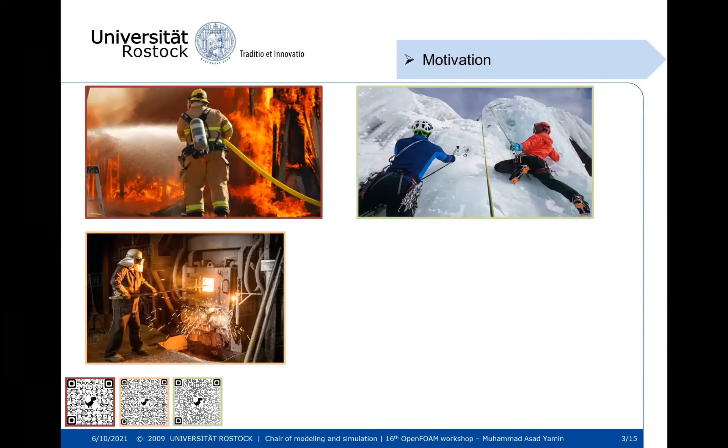From the motivation, I want to introduce the modeling of human outerwear like footwear, clothes, helmets, and gloves, which is very important and taking on greater importance day by day, due to crucial weather and working conditions like firefighting, forging and casting, and sport activities and championships. Just for the motivation, this video quality is a little bit off, but you can see it's running.

For the porous material in this situation, we have the fibers, water inside the fibers, and the water going from the fiber to liquid water. We have 3 types of water: vapor, bounded water, and free water. The transitions between these are sorption, desorption, condensation, and evaporation.

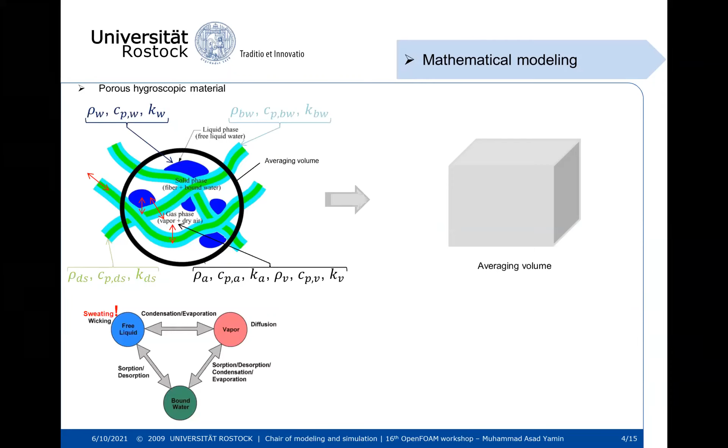In this model, sweating is not considered in the beginning. For the broader view, we change this material, because this material has physical properties: density, thermal conductivity, and heat capacity for the liquid water, bounded water, dry fibers, and the air and vapor present in the moisture. With more than 26 empirical formulas, I equate them, and at the end we have a new material with relative humidity and the corresponding relative physical properties.

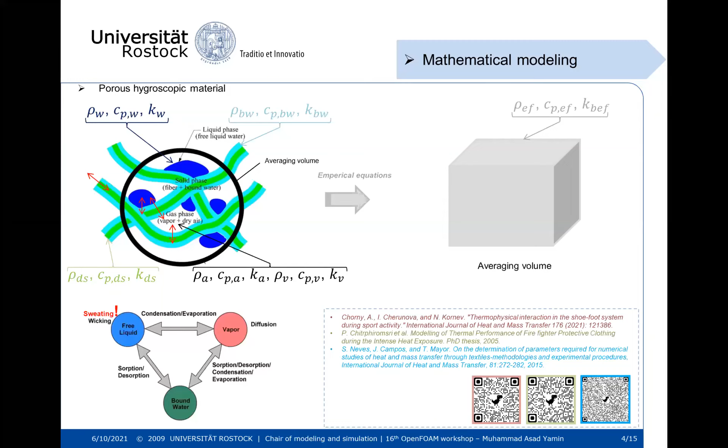For the full mathematical model, we have 4 transport equations: for water vapor, bounded water, and liquid water, with the parameters shown before. For bounded water and liquid water, we have equations for the water going from gas to liquid to gas, and then solid to liquid, liquid to solid, and gas to solid.

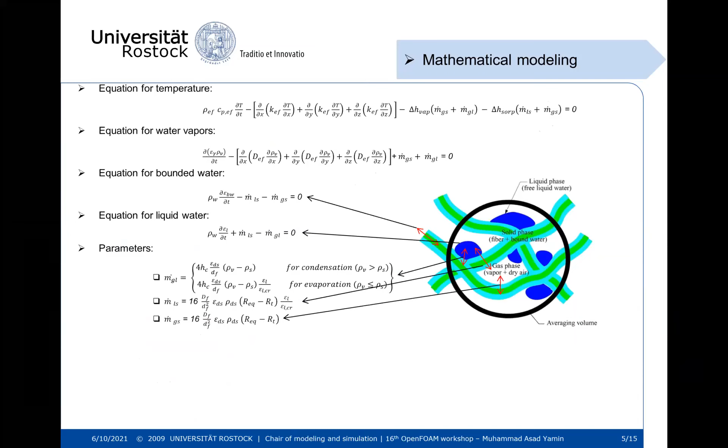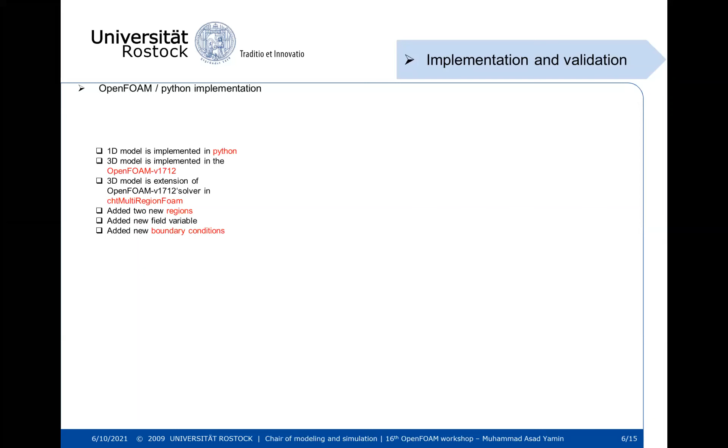Now I want to explain a bit about the implementation and validation. For implementation, we implemented a 1D model in Python and a 3D code in OpenFOAM, version 1712, using the solver chtMultiRegionFoam. This is actually an extension of that solver, where we added 2 regions for the fiber and the foam, along with some field variables and boundary conditions.

In this study, I consider the fiber region and not the foam region, because in reality the heat content and moisture come from the shoe to the sock surface. But in the future, we will also consider the foam region.

For validation, I have used the Gibson model, which is the most important model used for validating the results of this model. In the rows you can distinguish between the temperature plots and the vapor density plots, and the columns represent the hygroscopic and non-hygroscopic material.

For the simulation of the Gibson, I see for the continuous line or the dotted line, and overall simulation is matching with the dotted data. So it's exactly matching in the hygroscopic material that we will achieve at a very high value, and for the non-hygroscopic, it's achieved very early.

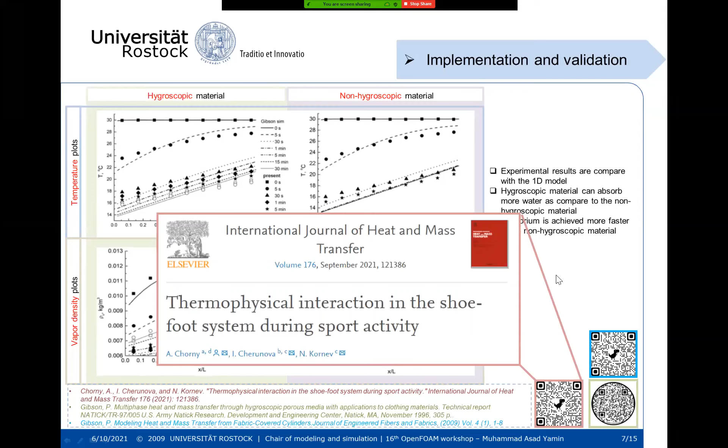Okay, thank you. So for this one, we have already submitted this paper last year and last month, and it has been accepted. So this model is which I am working for the 1D. So for the implementation for making the geometry, we use the 3D scanner for making this geometry.

And after this, because this geometry is very complex with very small layers, very small thickness, even less than 1 millimeter, you can see the socks which we get from this 3D scanner. We have the holes, and it's very difficult to make with the snappyHexMesh, the machine.

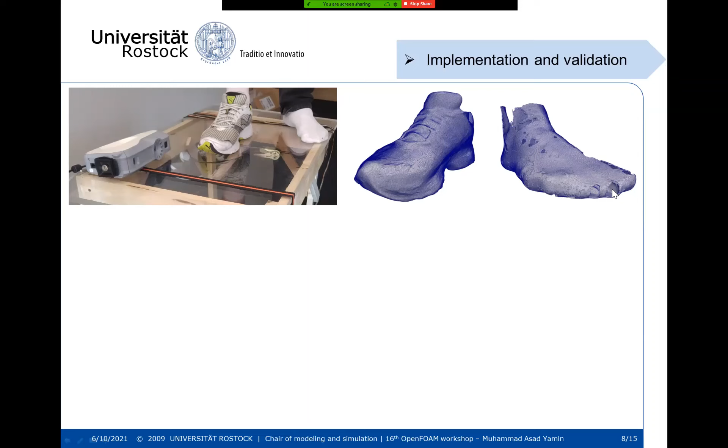It's very common, but for the 1D we have just taken one line and then extruded it, and then results implemented for the real shoes. But for the 3D actual result, I made just a more replica near to this shield, the shoe, with 3 layers for socks, shoe, and with different boundary conditions.

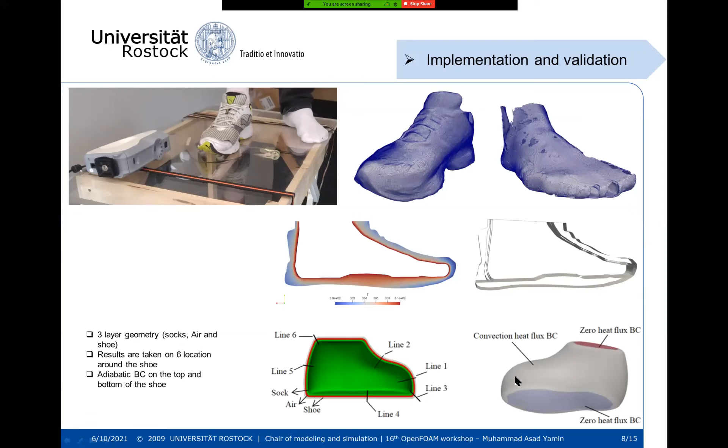The Dirichlet boundary condition is on the inside on the socks, and for the outlet we have 3 types of boundary conditions, with adiabatic on the top and bottom, and heat convection on the side. So the vapor density, meaning the humidity, and the temperature, we take as a boundary condition, Dirichlet boundary condition, at the inlet.

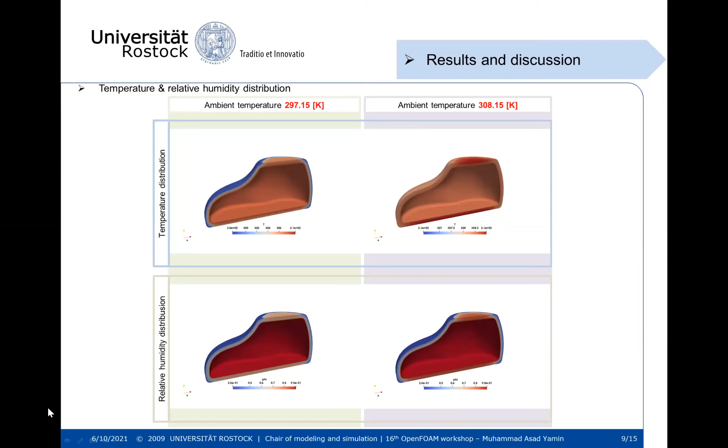So for this temperature distribution, I want to show the temperature and relative humidity, for the ambient temperature 24 degrees centigrade and 35 degrees centigrade. So here you can see, if you look column-wise, the temperature is more uniform at the high temperature, so the temperature reaches very near to the outside and inside of the shoe.

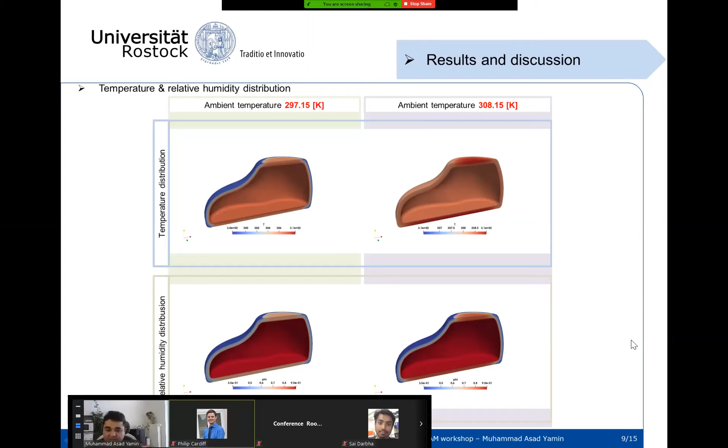So if I show you the temperature distribution results, you can see for the ambient temperature 24 degrees centigrade and 35 degrees centigrade, for the shoe material polyester, polyamide. And here I am just changing it so the inside the sock is cotton and the outside shoe is polyamide.

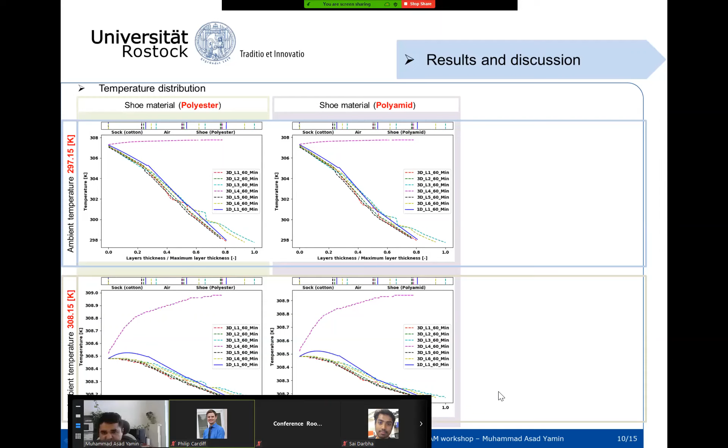So if you compare, you see at first there is not a huge difference if we compare the 1D results with the 3D results, because in the 1D just the temperature gradient is in the normal direction to the footwear, but there isn't a lot of temperature gradient in the transverse direction.

But in the same way, if you see at the ambient temperature 35 degrees centigrade, there are 2 phenomena: one, evaporation is coming into account, and second, the comfortable level of the shoe is also becoming very low.

But at the end, if you calculate the difference between these two simulations, you can see the more comfortable level is with the shoe material which has more thermal conductivity, meaning the polyamide. Here the shoe will be more comfortable at the low ambient temperature.

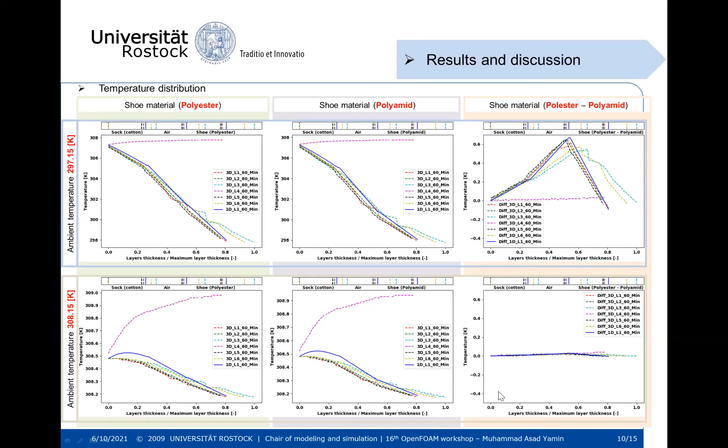But if the ambient temperature is high, then this phenomenon doesn't matter which material you are using, the comfort level for both shoes will be the same. The temperature distribution will be the same. It's a very good finding for this.

A lot of research is present in the literature where they have modeled the shoe with just conduction and convection, without moisture transport. But we also want to analyze this behavior, how it acts if I use the moisture content versus without moisture content.

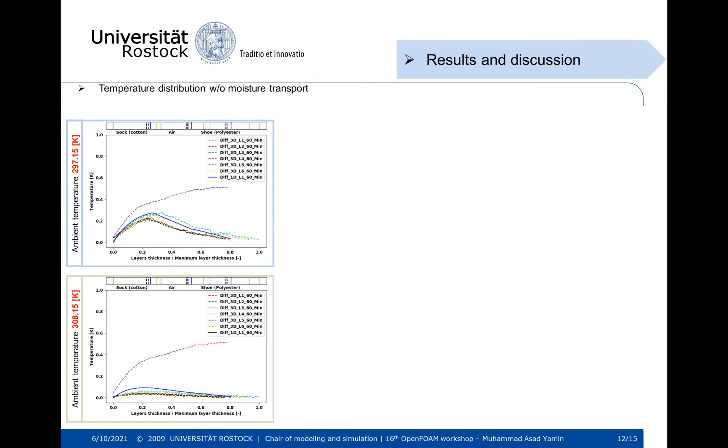At the low temperature, you can see this has very less difference, less than 1 Kelvin, and at high temperature it's also decreased. But I didn't find any data on whether this 1 Kelvin difference, if this high temperature remains in the shoe for 60 minutes, will affect the comfort level of the wearer - this is still under debate.

So I want to see for the 1D model, if I change the thickness of the shoe layers for the socks and the shoe, does it affect the moisture transport modeling.

At the low temperature, if the temperature is very low, you can see with more thickness of the layers, the effect is growing.

But at the high temperature, you can see here this is a negative effect. Why negative? Because evaporation comes into account - the state of the water is changing, but it didn't raise the temperature. But in the other case, without the moisture transport model, the temperature is raising because there is no moisture there - the moisture transport modeling is not present there.

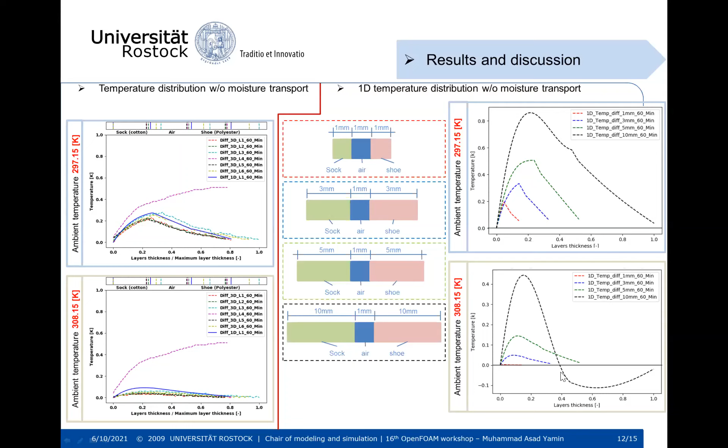So at the end, to summarize and conclude: the majority of the temperature gradient is in the normal direction in the footwear, and the sole is the most uncomfortable part of the shoe. At 24 degrees centigrade ambient temperature, the shoe with the higher heat conduction value is more comfortable, and at 35 degrees ambient temperature, the comfort level of both fibers is approximately the same.

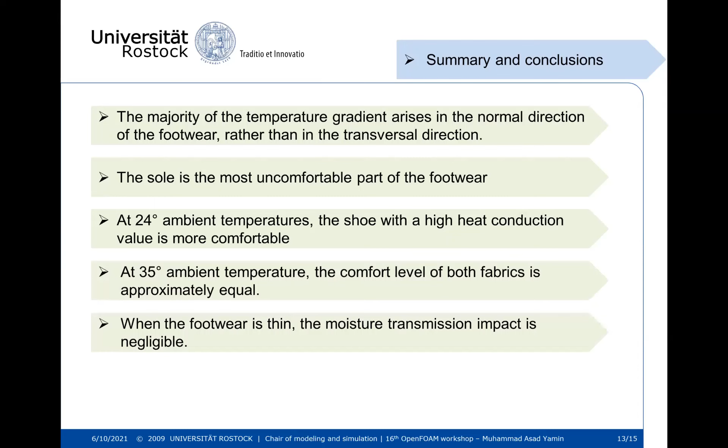When the footwear is thin, the moisture transport impact is negligible. But the last conclusion - when the ambient temperature is high and the footwear is thick, then the moisture transport impact might be significant. This is just one conclusion.

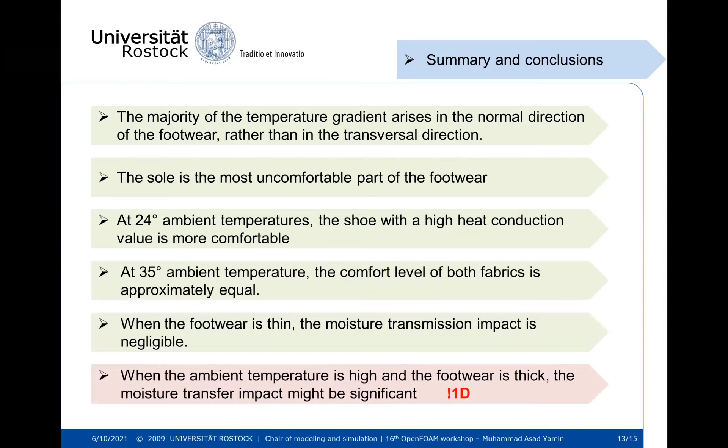This is for you, for the questions. If you have any question - this is from my supervisor, Professor Cardiff, and Professor Vigan.

So this is all from my side. Sorry for the interruption a little bit in there.

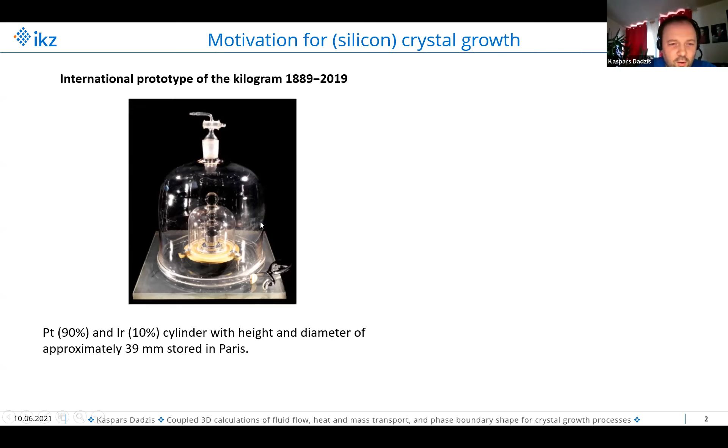Actually, if you think about the history, how the kilogram was defined, this is what was used till 2019, this very old prototype stored in Paris. And what changed recently was that the new prototype of the kilogram unit is actually made of silicon, and this was done because silicon is one of the most perfect and pure materials which can be produced at all. And that's another important application of silicon.

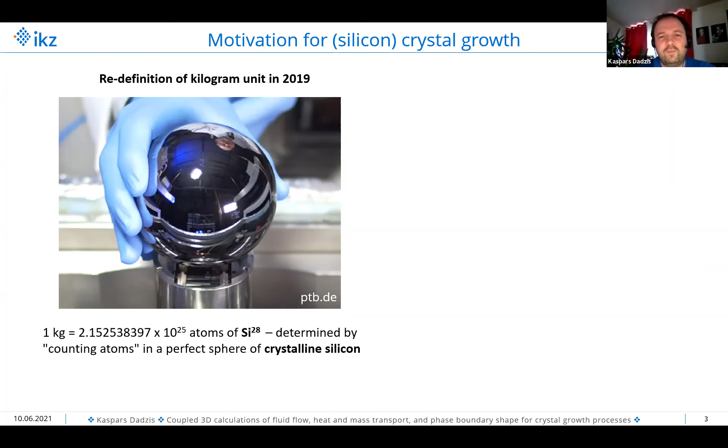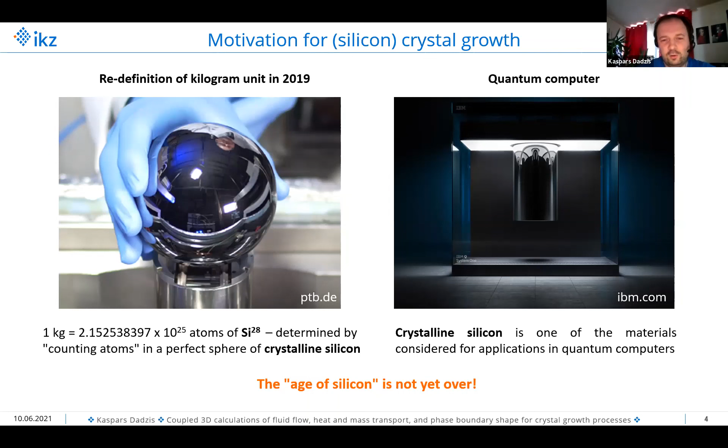And of course, if we think about the future, silicon is also one of the materials which is still researched for quantum computers. So I can say in conclusion, the age of silicon is still not over. So the question is how do we get such silicon crystals for all these applications? And this is the topic of my presentation. There are many methods which are used for different applications, and they differ in quality and also costs and so on. And I will try to introduce all of them to you a bit.

The simplest one, which was used for solar cells, is the so-called directional solidification. It's quite a simple method. We have a container where we melt the raw material, then we have the liquid, then we cool at the bottom, and the liquid freezes from bottom to top, and we have a moving phase boundary. So it's quite easy to understand, but of course you have a lot of physics here. You have melt flow, heat flow, you can have some forces driving the melt flow, and so on.

And the basic idea is the same for all the other methods, like the Czochralski method, where we pull the crystal out of the liquid, and also for the granulate crucible method, where we have not a container, but actually a layer of solid silicon granulate which contains the liquid. And the most complex method is the floating zone method. In this method, the melt is actually sitting on the crystal itself, so the melt does not have any contact with other materials. It was the method used to produce this kilogram unit material.

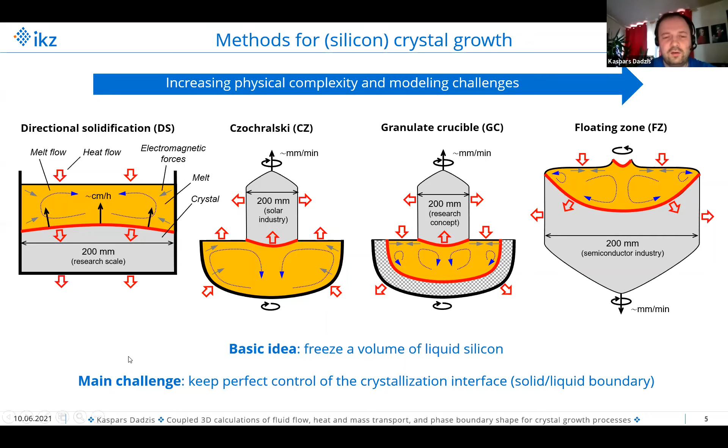So as I said, the basic idea is quite simple. We have to freeze a volume of silicon, but we have to do this in a very controlled manner, and we need to keep perfect control of the interface between the liquid and the solid. So let me show you briefly how this works in reality. First we look at the Czochralski method, where we have a liquid which has been molten in a container, and then we touch the material at the surface with a solid seed, and then we pull it out, and we have this kind of rod which is solidifying, and this is the grown crystal.

This is the Czochralski method, and the most challenging method is the float zone method. Here we have a high frequency inductor, and we are pushing from the top a rod of solid material, and it's being melted by the inductor, and we will see what happens next. We can see this is the liquid part here, and it is sitting on top of the growing crystal. So it's a very dynamic method where the liquid is freely sitting on the crystal. But it's a very big liquid drop, and the diameter of this crystal is up to 200 millimeters. In this movie, it's 100 millimeters.

Okay, so that's just to give you an impression how dynamic these processes are, and of course, to make some models for such processes, we need an easy frame of reference. Let's put it that way. And the most convenient frame of reference is a case where we have an interface at a constant position.

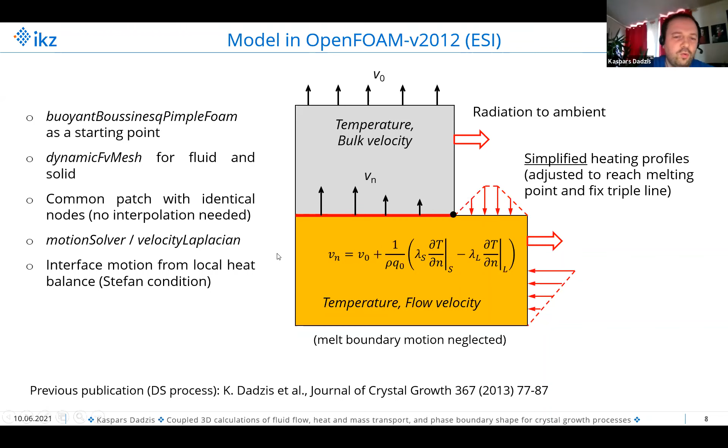Okay, so the first task is to make a mesh, and what we tried here is to keep it as simple as possible and use blockMesh. It's quite important for this process to have good boundary layers, and in blockMesh we have full control of this. But if you think about these very curved geometries, you can understand that the setup becomes quite complex. So therefore, we developed a Python package where we can connect many blocks, up to 51 blocks, in an object-oriented way, where the topology, connections and grading work automatically.

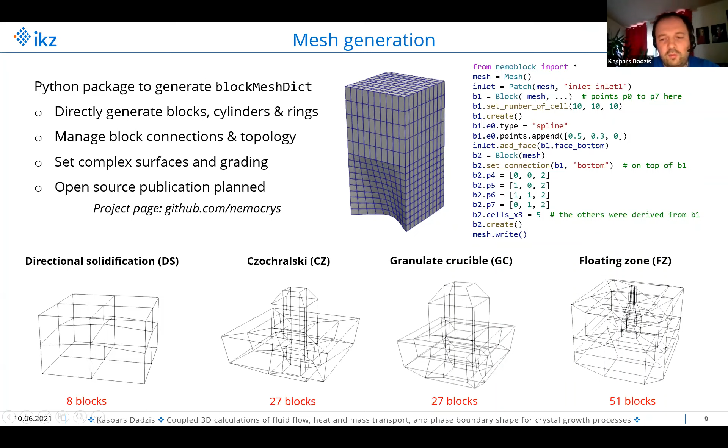So this is what we started, and this will be published open source. So if you are interested, let me know. And here you can see a very simple example for this 2-block geometry, and this is what you actually need to write as a script in Python, and then the library generates a blockMesh dictionary. And here you can see the topology of all the geometries which I showed to you, and it goes from 8 blocks to 51 blocks. Okay, so let me show you a few examples for all these cases.

So we start with directional solidification, the simplest method, and what you can see here is at the beginning we have 10,000 seconds where we just calculate the temperatures, then we calculate also the mesh motion for 10,000 more seconds, and at the end we have 200 seconds of melt flow. You cannot see this so well in this picture because it's showing just the temperature field, but you can see quite well the deformation of the boundary between the solid part and the liquid part. You can see it starts moving now, and the triple line here remains at the same position.

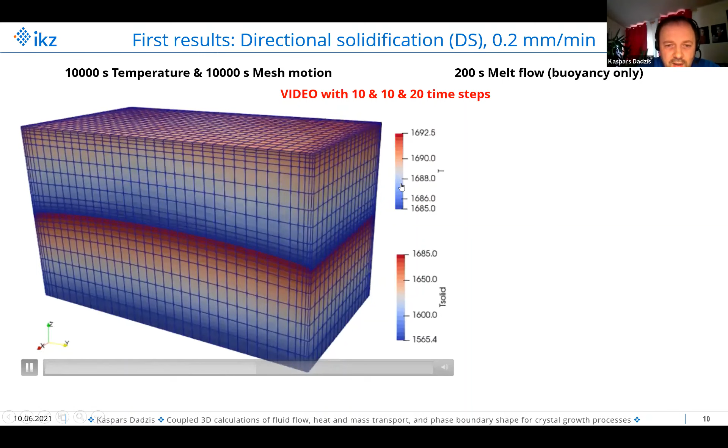When we look at the flow, we have considered just buoyancy in this case. You can see a flow pattern with quite weak velocities because the gradients are not so large in this method.

But nevertheless, there are some problems here when you look at the deformation. So you need to be very careful with the mesh and mesh motion methods to keep this stable.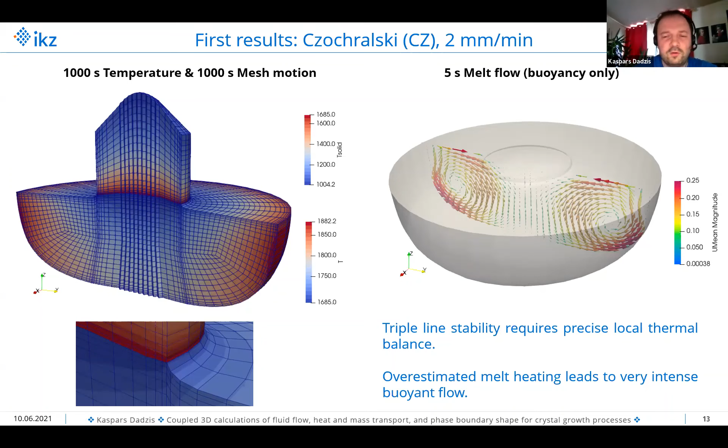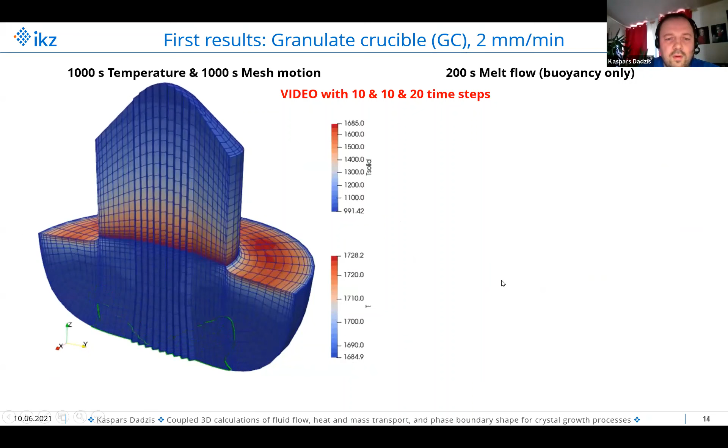Okay, the third method, the granulate crucible. You can see the interface will start moving now, but it remains still quite flat. And at the end, when the melt flow is starting, you can see also some mixing here in the melt. And when we take a closer look, we can again see a buoyancy flow here, but it's much weaker than in the previous case because the heating is done on the top here. In the previous case, it was done here at the side.

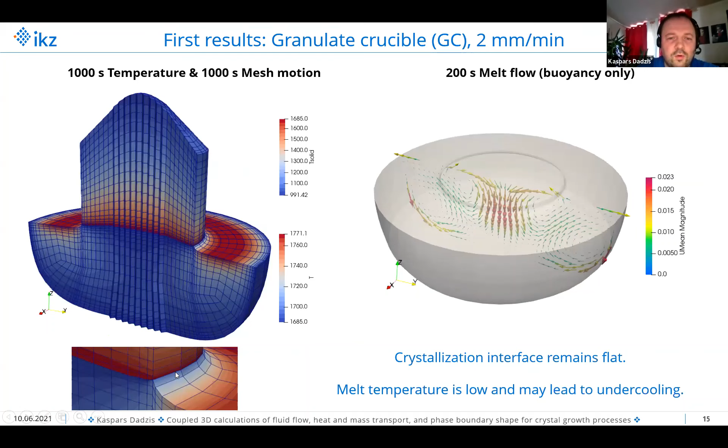So the last example is the float zone case, where you saw the video at the beginning. So now the interface starts moving, and we can see the crystal is growing longer, and the interface also goes down, and it's also quite deformed, and this is a kind of a feature of this process.

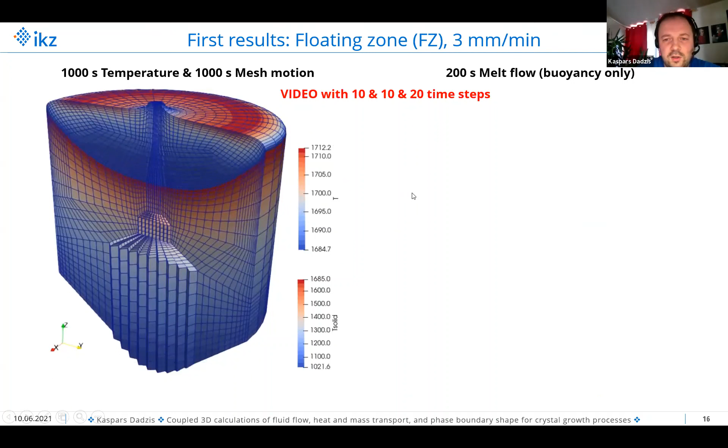And what we can see here again for the melt, we can also have a not very strong melt convection, but it can have an important role in the process. And here we can see a problem also with the mesh, due to the high curvature here at the triple line.

So let me come to some conclusions. So this was the new solver, which aims to investigate the dynamics of several crystal growth processes for silicon. And in the future, we will also consider more exact boundary conditions for the temperature and also more forces in the melt. And of course, we will need to try different methods for grid deformation which are more robust. And finally, we will also need some validation experiments where we will use model experiments for this.

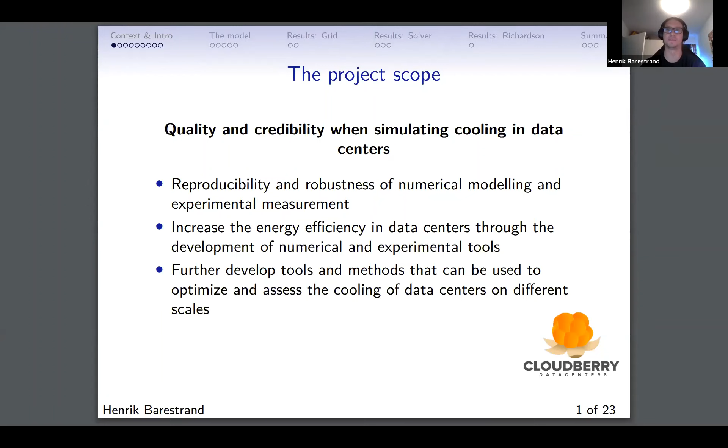So in data center CFD, my project is about quality and credibility, simulating cooling in data centers. It's about having reproducible results to then use those models to increase energy efficiency in data centers, and then to develop tools and methods to run these models in an optimization sort of mindset. The goals of this work have been to model the data center facility, check the grid requirements, and compare these two solvers, which is sort of an integrity check of the OpenFOAM solvers in themselves.

We know that the Boussinesq approximation has been thoroughly studied, advantages with incompressible, and we know something about the errors that we can expect. For data centers, we don't know this. So part of this has been to see the feasibility for data centers, to see how much we actually gain. And it has been demonstrated to solve the fluid flow in data centers before, so now we do it slightly more thoroughly.

Data center modeling is nothing new in CFD. So here we focus a little bit on the grid sizing, everything between 6 inches, close to 15 centimeters, to 1 inch in the open airspace region, because we know data centers are very big and we have long periods of time in between server loads and how they distribute.

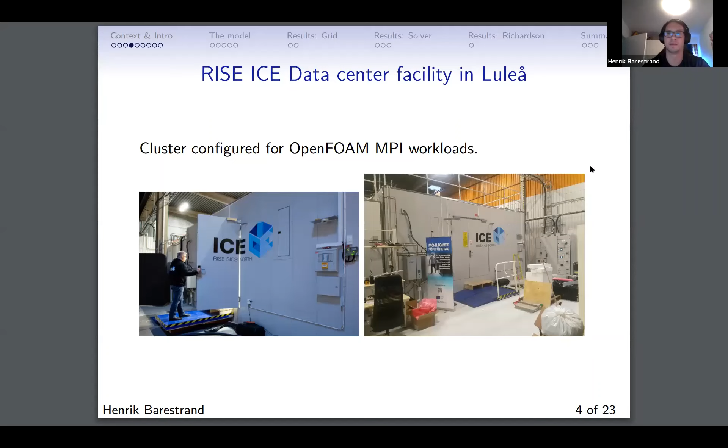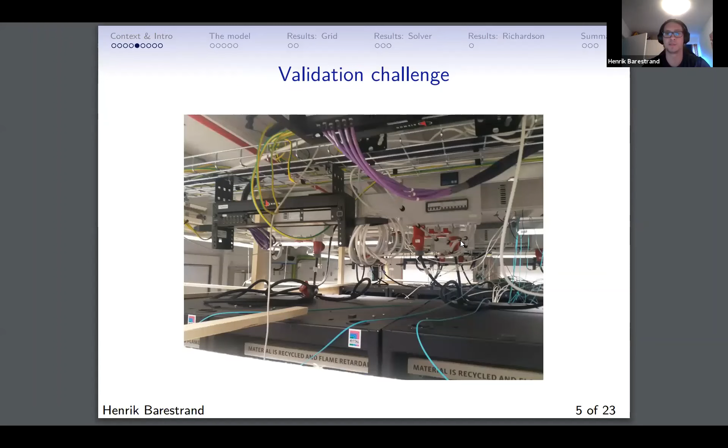We have our facility in Luleå, where we have configured a cluster for OpenFOAM MPI workloads. And we use this cluster to simulate this data center test cell that we have, which can look something like this. Hence, it's a validation challenge. But here, the focus is on verification with OpenFOAM. So we have a very simplified model. It's not exactly the same data center, so we don't have to worry about porous zones and such for those cables. But it's still quite a simplification.

So what you see here are 2 rows of racks, where we have cold air coming in on the blue sides. We have 10 of these racks, and then the slightly hotter air on the orange parts rising to the roof. Air comes back into the cooling units on the sides. We have 4 of them. And then cold air is delivered to the servers from these gray areas. This is a hard floor configuration. In reality, it might look something like this. We have these 2 cooling units, a porous zone in front that sends out this cold air in a uniformly distributed manner. And then we have the front side of the servers.

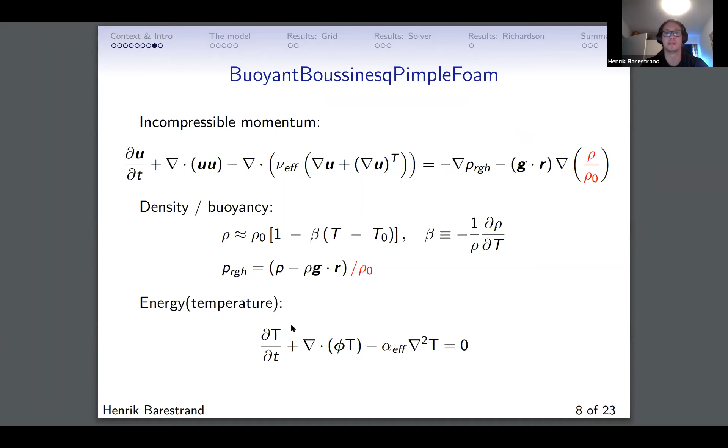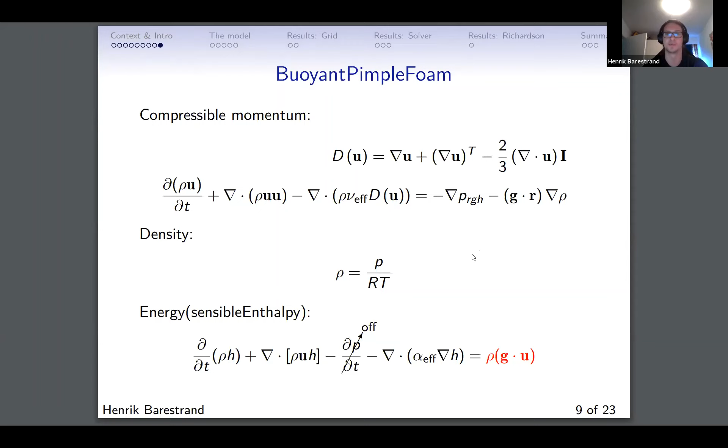You know, buoyantBoussinesqPimpleFoam and its assumption of how density varies linearly, and the incompressible simplification. And the energy equation, in this case, is very simple. And buoyantPimpleFoam, where we have the compressible version, we have the equation of state and an added term to the energy equation, with this pressure term off for the pressure work, as it makes quite a difference in convergence properties for this type of problem.

As for the boundary conditions, we increase rack enthalpy by the server load. And other than that, we have constant mass flow rates on everything. So it's a steady state situation, but we need to solve it transiently to estimate turbulence statistics. And there's a small opening in the roof set for the atmospheric pressure reference to improve the convergence.

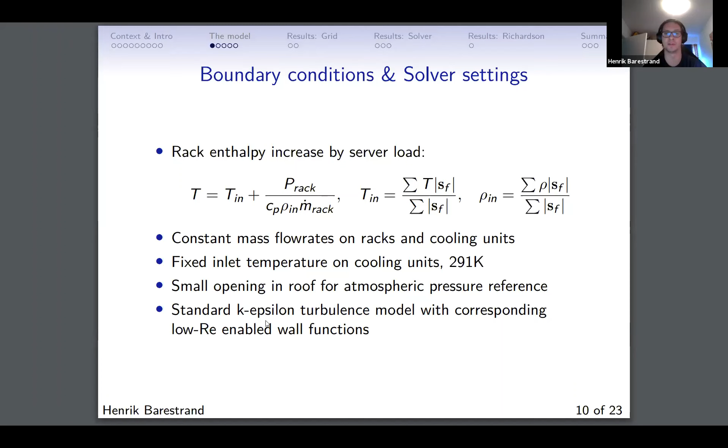With this sort of flows, there's no other alternative than to try to use RANS models to get computational economy. And we have low Reynolds number enabled wall functions at the walls. We try 7 different grids in between 100K cells, something like that, to 2 million, even 10 million at some point, but it shows different results.

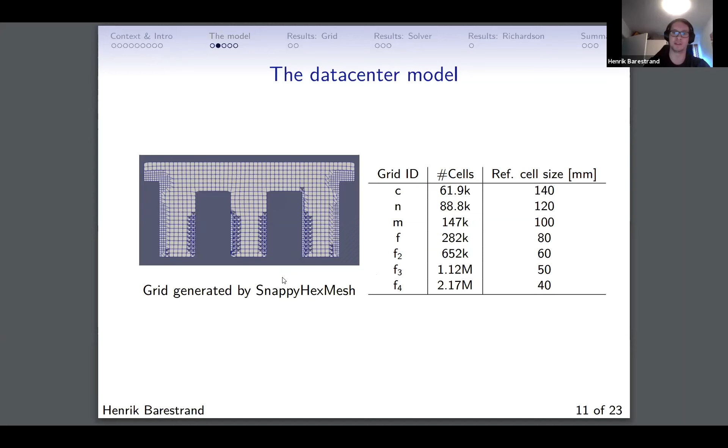And the grid is generated by snappyHexMesh. Something like this for a simulation matrix to test out the Boussinesq and compressible solver. And then we try 2 different flows, a typical mass flow for server flow rates and a low mass flow for server flow rates. And as you can see for the finer grids, F to F4 here, the wall Y plus starts getting close to 30, which means we are in the buffer region here. So we can't refine more because we will lose accuracy of how the RANS models are defined.

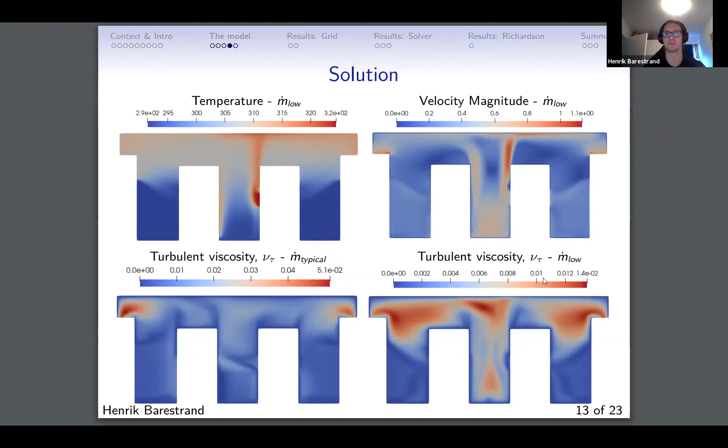So if we then look at the solution, here you can see a typical cross section of a solution. Low flow rates on the top for temperature and velocity magnitude. And you can see the hot aisle air coming up to the roof and then out to the servers on the sides. And then we have typical turbulent viscosities. And there's an order of magnitude lower for these turbulent viscosities when we have a lower mass flow rate to the bottom right here.

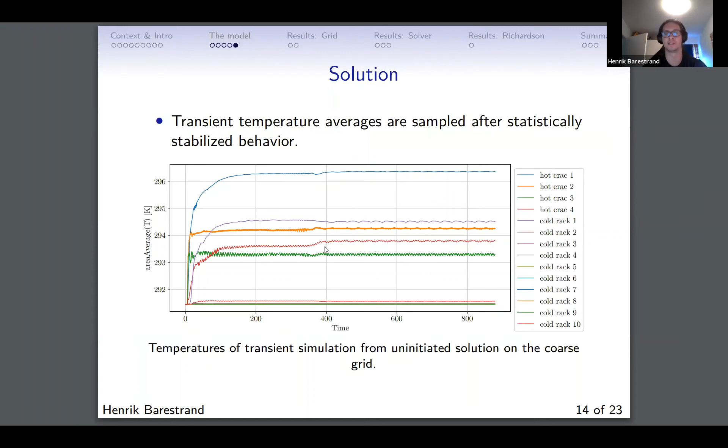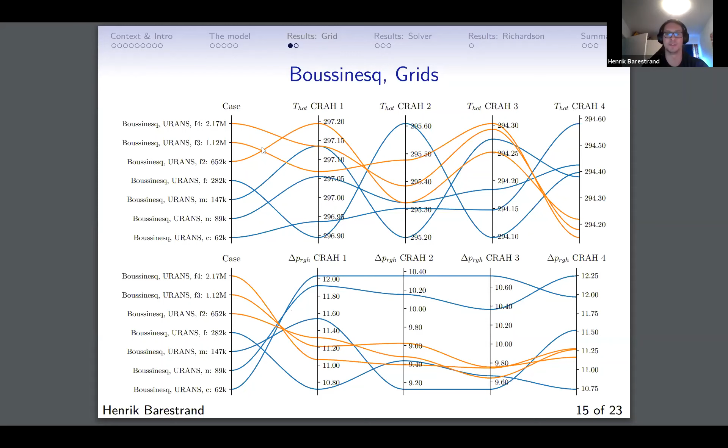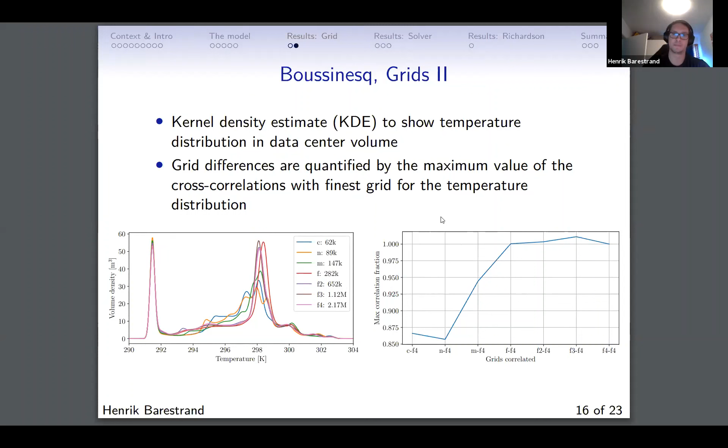So if we look at the graph to the left, we see the 3 finest grids. They are pretty much spot on onto each other, no artificial numerical diffusion in the volume. And that's also again confirmed on the right graph, where we see that this cross correlation starts matching up really well. And these are all in reference to the finest grid. So now we know that. We know the Y+, we know what sort of grid we need to be in that region.

We can compare the Boussinesq and compressible ones by a visual inspection like this. And we see the Boussinesq one has the coarse grid, the F grid here. It's slightly off. This happens because there is recirculation into one of the servers. So hot air starts coming back and we heat it up twice. So for Boussinesq, this would have to go a slightly finer grid than the compressible one. Yes.

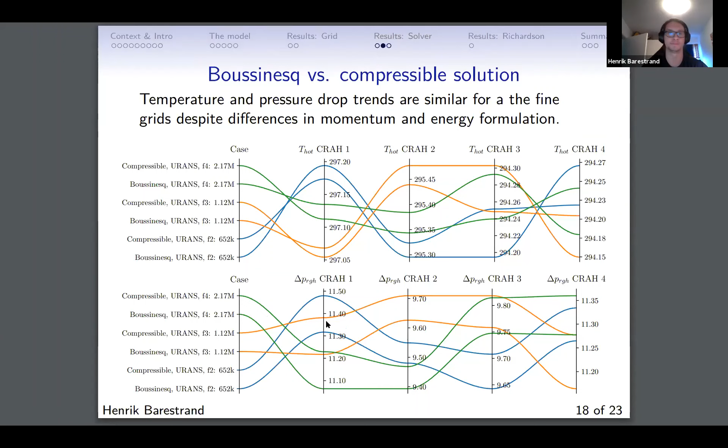And then if we compare the solutions for these 3 grids, we can see consistently for the pressure drop, being the bottom graphs here, being in the 11 Pascal range. The pressure drop is consistently higher in the compressible solver. And this has to do, I think, with the extra thermal energy equation and also it being compressible in itself. But the trends are pretty much exactly the same, other than that, also for temperature. So that's reassuring.

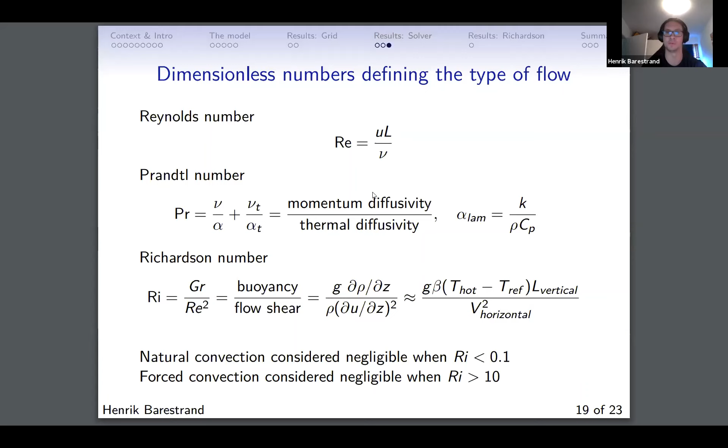Richardson number, closely connected to the Boussinesq assumption. And we know that we have forced convection; you can neglect it when you have Richardson higher than 10. And natural convection is what we want to work towards. So we want to see, is it feasible if we take down the fan speeds to have a natural convection?

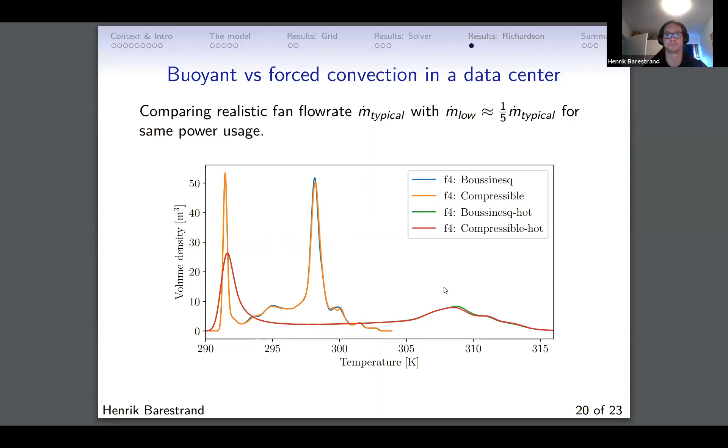And then for the hot case with lower flow rates, we see that certainly there is a higher temperature generated from the servers, also acceptable in terms of CPU temperature. And they still match up pretty well, Boussinesq and compressible.

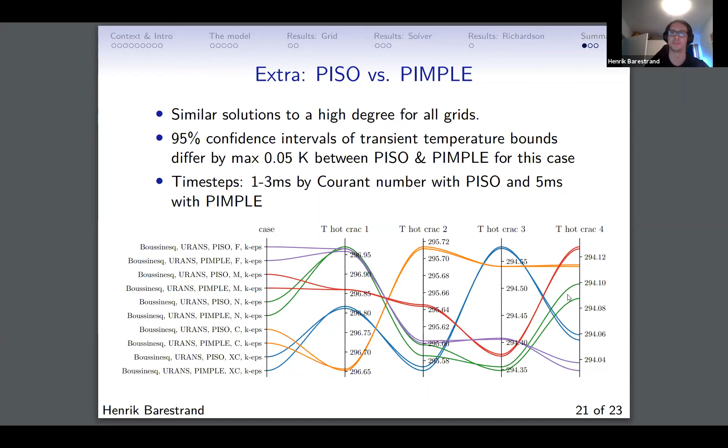And we come to the conclusions with that. Solvers are viable options. Pressure drops are consistently high with the compressible solver, as expected. The compressible solver is slower, between 20 to 40 percent, though it's experienced to have better convergence, so we can rely more on that one. It possibly allows a more coarse grid. That's all from me, thank you.

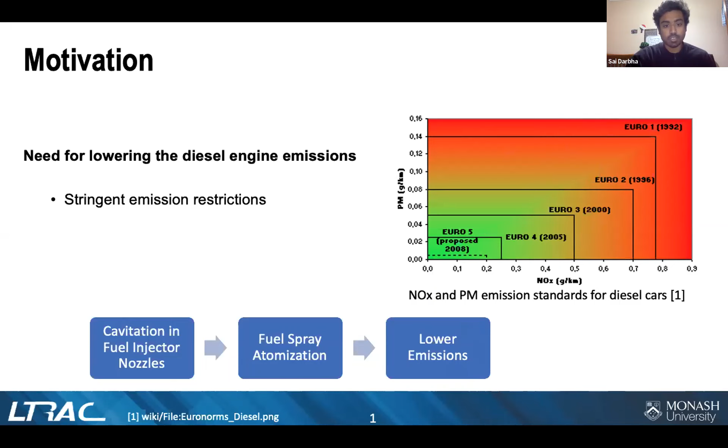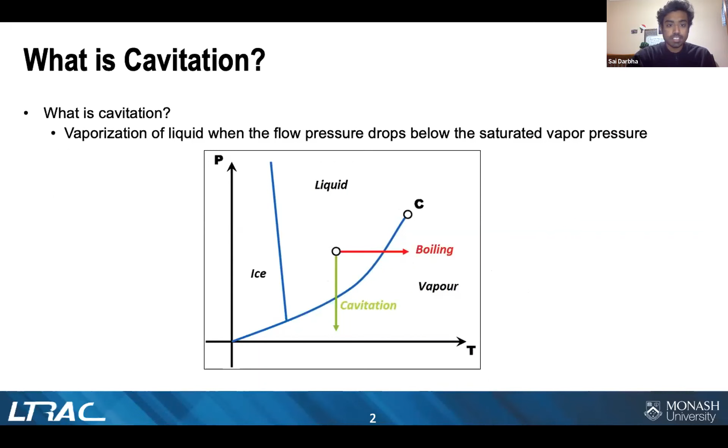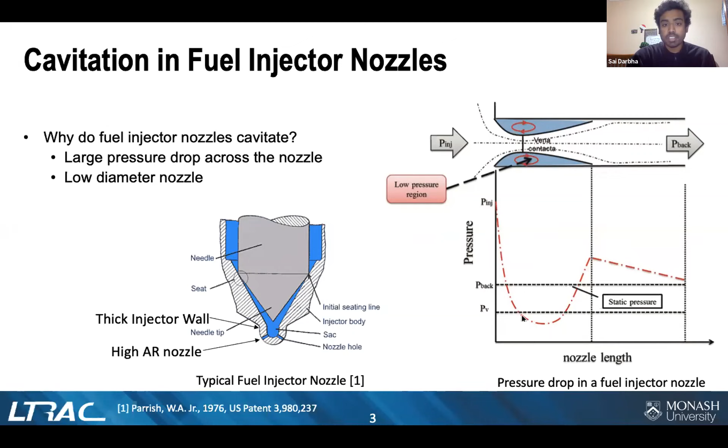Let me start by explaining what cavitation is. Basically, it's the vaporization of liquid when the flow pressure drops below the saturated vapor pressure, as seen in the phase change diagram. Fuel injector nozzles cavitate because the fuel rushes in from the upstream region at very high pressure and passes through a very small diameter nozzle. This is important to form a fine mist in the combustion chamber. As the fuel passes through the small diameter nozzle, the flow accelerates, and near the nozzle inlet, the flow pressure can drop below the vapor pressure, giving rise to cavitation.

We all know from marine applications that cavitation is often thought to be detrimental because the implosion of cavitation bubbles causes erosion, and that can be seen here on the injector wall, which is damaged because of cavitation.

However, in fuel injector nozzles, there is an advantage to having cavitation. Researchers have seen that with the presence of cavitation, the ensuing outlet jet spray has a larger cone angle and lower mean diameter. Basically, it has a better spray.

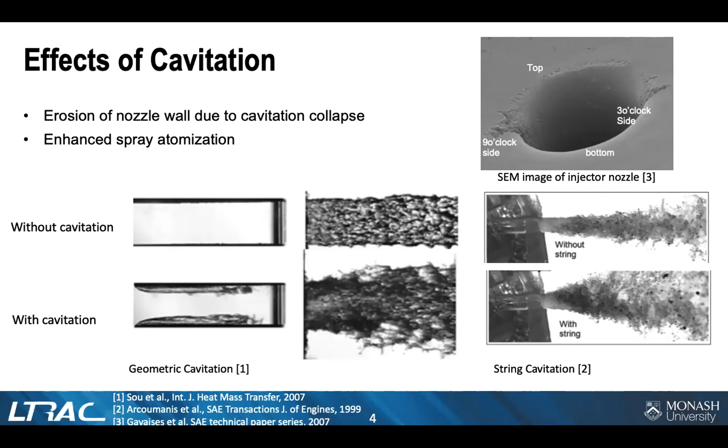However, the nozzle internal flow, which affects the outlet spray, is not well understood. One reason for this is the inherent limitations in experimental investigations, owing to the scattering of light at the liquid vapor interfaces. Further, due to the small diameter and high flow velocity and pressure, numerical models are often used to supplement experiments to characterize the flow within the nozzle.

In this work, our goal is to study the fundamental fluid mechanics instead of modeling a complete prototype realistic fuel injector nozzle. Therefore, we use a canonical cylindrical geometry as shown here, which is just a change in diameter, and the flow comes in and gives rise to cavitation within the nozzle. Our aim is to characterize the cavitation intensity as a function of the flow parameters.

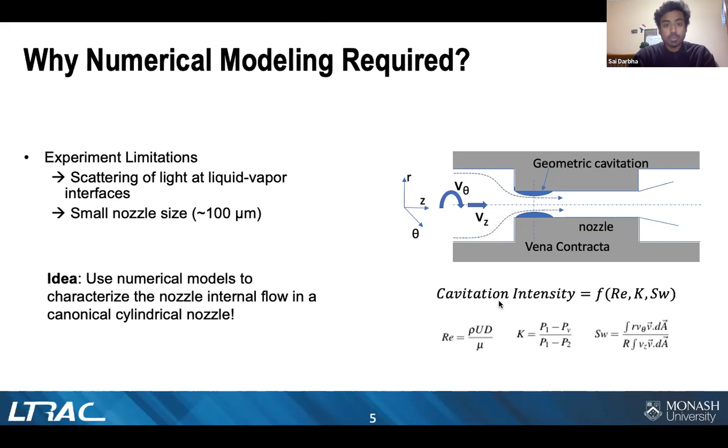The first step is to determine the computational models to be used. For modeling the multi-phase flow in the nozzle, the most detailed approach is to solve conservation equations for both liquid and vapor phases. However, that is prohibitively expensive, so we introduce some simplifications.

The first simplification is to consider a pseudo single fluid, which is like a continua consisting of both vapor and liquid phases. We also use a homogeneous flow assumption, wherein we assume there is no momentum difference between the two phases. Using these assumptions, we can solve for the mixture density.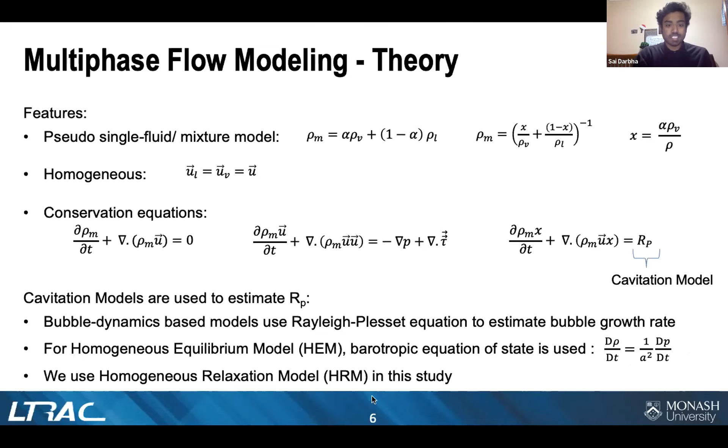For example, bubble dynamics models use the Rayleigh-Plesset equation to estimate the bubble growth rate. We use homogeneous models in this work, wherein the homogeneous equilibrium model uses a barotropic equation of state, which couples the pressure and mixture density. We use a homogeneous relaxation model in this study, for reasons I'll explain.

There are two extremes in the spectrum of homogeneous models. One is the frozen model, where no heat transfer is considered between the phases. On the other extreme lies the equilibrium model, wherein the heat transfer between the phases is considered instantaneous. However, both of these are actually unrealistic extremes.

We would like to model something closer to nature, wherein there is a finite time taken for the heat transfer. So we use a homogeneous relaxation model, which models the non-equilibrium heat transfer using an empirical correlation.

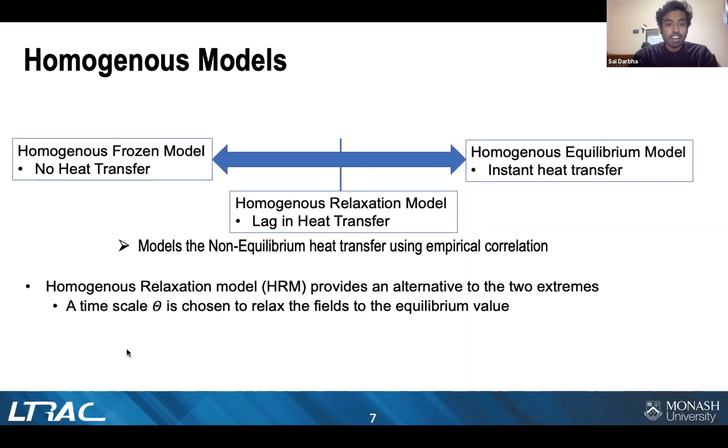A timescale theta is chosen to relax the fields to the equilibrium value. This is how the homogeneous relaxation model solves for the change in quality: it relaxes the instantaneous quality to the equilibrium quality using the empirical timescale theta.

This timescale is obtained using the Downar-Zapolski correlation, where Downar-Zapolski had done experiments on vaporization of water in long cylindrical pipes to obtain a relationship of theta with respect to alpha, the vapor fraction, and psi, the non-dimensional pressure. Interestingly, the model parameters they obtained also work for our working fluid, which is a gasoline surrogate.

Moving on to the simulation setup, we are using a canonical cylindrical nozzle to allow for computational feasibility. We are doing 2D simulations with an axisymmetric assumption, wherein we just consider a wedge angle of 1 degree.

We use a reference geometry from experiments done by Duke et al., wherein the diameter of the nozzle is 500 micron, and we are doing RANS simulations with the realizable K-epsilon model. The homogeneous relaxation model code is implemented in the Foam Extend 3.2 environment. So yeah, this is the geometry.

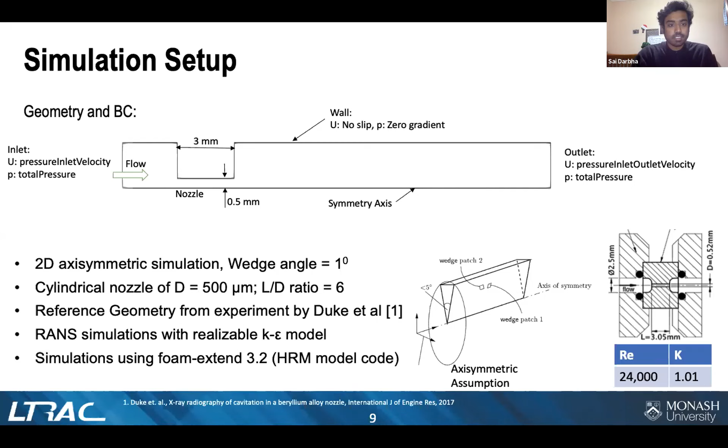I'll quickly move on to the results now. The purpose of this talk is to compare the performance of different homogeneous cavitation models. Here we compare the homogeneous equilibrium model and the homogeneous relaxation model. The homogeneous equilibrium model is actually available in OpenFOAM with the cavitating foam solver, and we compare it with the HRM results.

Firstly, we look at the vapor fraction on the top. We see that initially cavitation is formed near the nozzle inlet and is, because of low pressure, trapped within the recirculation bubble. This then stretches downstream in the form of an attached cavity sheet, which is reflected in both HEM and HRM.

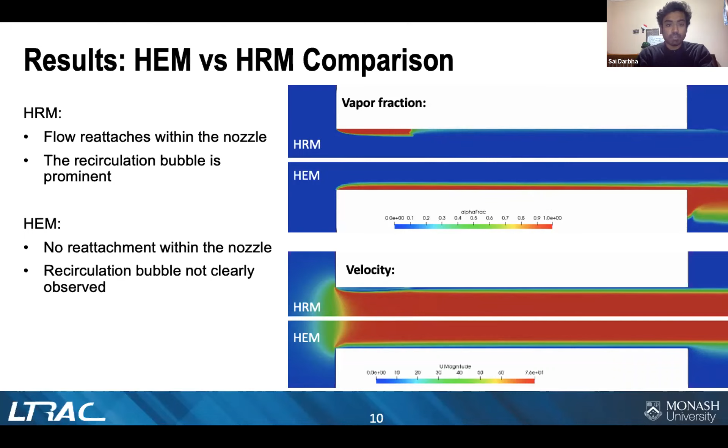However, as the pressure recovery occurs somewhere along the midway through the nozzle, we expect that the cavity sheet will get pinched off and shed downstream, and we expect a profile as seen in HRM. However, with the homogeneous equilibrium model, we don't see any reattachment point within the nozzle, which is also evident from the velocity profile, wherein the recirculation bubble is much more clearly defined for HRM.

The reason for this is because of the barotropic equation of state, which the homogeneous equilibrium model uses, which basically couples the pressure and density tightly, and there is no baroclinic torque, which is required for the reentrant jet to form.

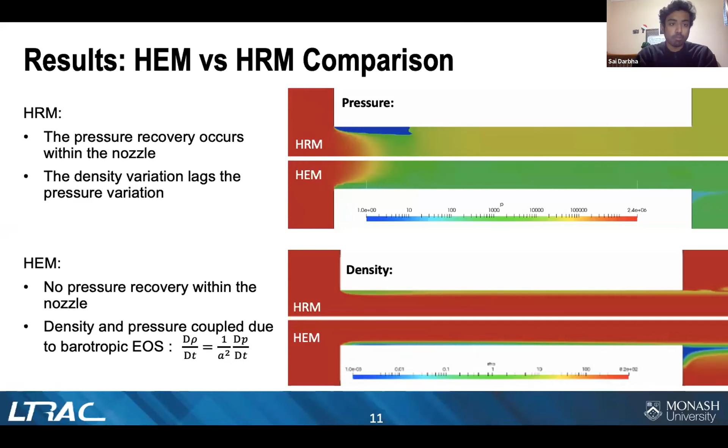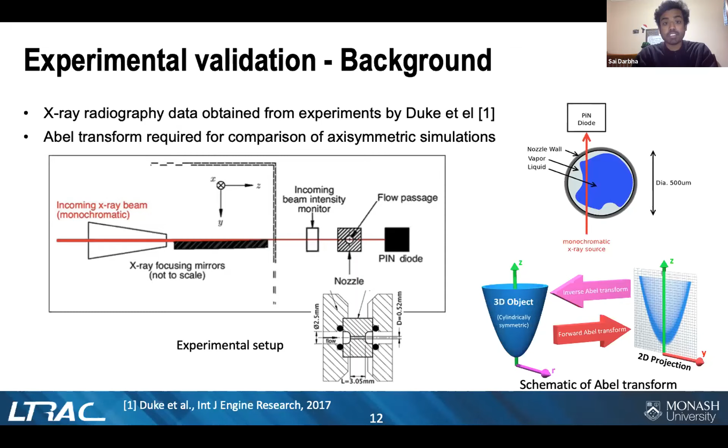I'll quickly show the experimental validation as well. I won't touch much upon the experimental procedure. Basically, we have taken the reference experiments done by Duke et al. in Argonne National Laboratory, where they have measured the vapor fraction in cylindrical nozzles quantitatively.

This is because we have modeled smooth walls, and in reality, in the experimental nozzles, we expect some surface roughness to be there, which could give rise to extra cavitation to form.

So with that, I conclude my talk. Basically, we see that the homogeneous relaxation model is qualitatively matching the experimental results better than the homogeneous equilibrium model.

Further, if we look at the fluid mechanics involved, we see that the reattachment point and reentrant jet are also modeled better with the homogeneous relaxation model.

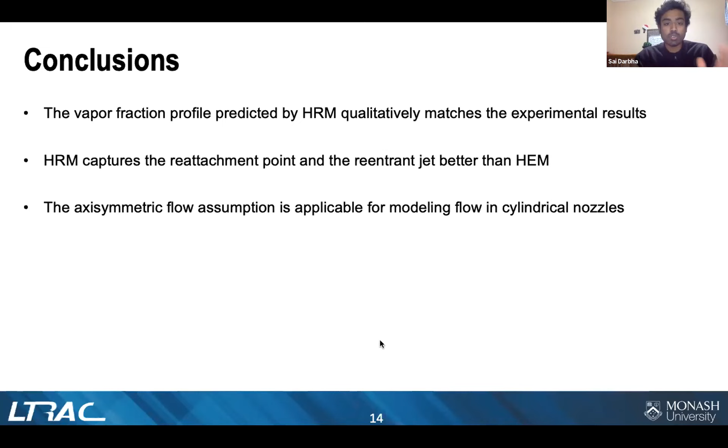Thanks, Sai, for a very nice talk. Some nice results there. So if people have questions, feel free to put them in the Q&A. We're just over time for this session, so maybe I can just put one question to you, Sai. From your validation, it looks like the HRM model does better, but still there are some differences with the experiments. Are there improvements to the solver, or to the geometry or boundary conditions you think you plan to make to try to improve the fit to the experiments?

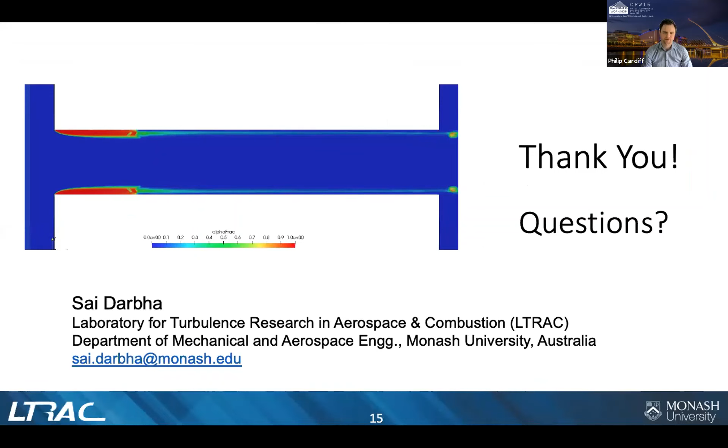Yeah, actually, there are a few things we are considering so that we can match with the experiment better. First is that we are using a sharp edge for the inlet corner, whereas in the experiment, no matter how good the machining techniques would be, there would still be some radius of curvature at the inlet.

So we have the SEM image of the experiment nozzle, and we are thinking of looking at the actual radius of curvature and modeling that, so that it matches the expected trend better. With the sharp edge, the cavity thickness is expected to be higher. So if we make the inlet corner rounded, we would probably see a better match with the experiment.